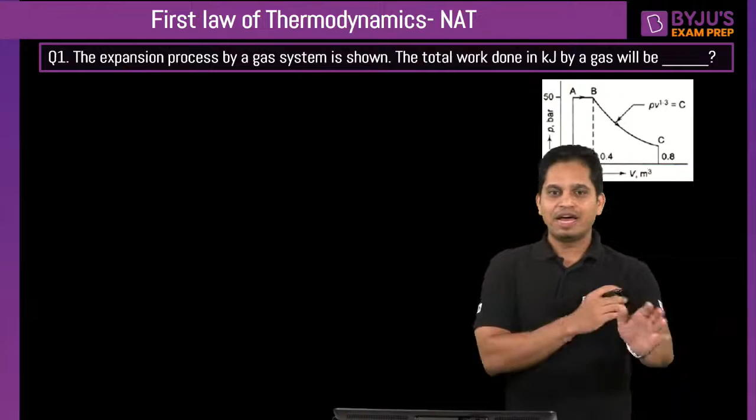So you see this diagram, right? So let me write the data here. What is given to you? So we have process A to B. Here pressure is constant. PA is equal to PB is equal to 50 bar. And VA is equal to 0.2 and VB is equal to 0.4. It is a constant pressure process. And we all know,

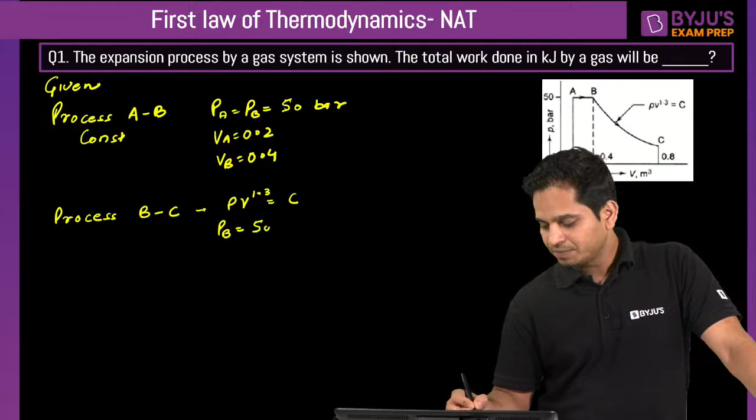Okay, so process BC is following PV^1.3 equals constant. What do we know here? We know PB is equal to 50 bar. PC I don't know. VB I know, which is 0.4, and VC is 0.8. It is a very basic question and it is a GATE level question. We will come to more complicated questions, very nice questions where you will actually feel that you have learned something new today. Okay, so let's start this.

We have two processes. Total work done is what? Total work done is work done by AB process plus work done by BC process. And I already told you in the Telegram group, please revise your first law concept: heat transfer, work transfer, first law for a cycle, first law for a process. So we all know this, right?

So work done for process A to B is a constant pressure process. So it is P times VB minus VA. Do I need to solve this for you? Work AB is, that is right, 1 megajoule, yes. That is correct, Bhavya, very nice. Work BC is 1.25 megajoule, that is correct. I want everyone solving this, really. You need to understand the importance of solving the question. I know that you know how to calculate work AB.

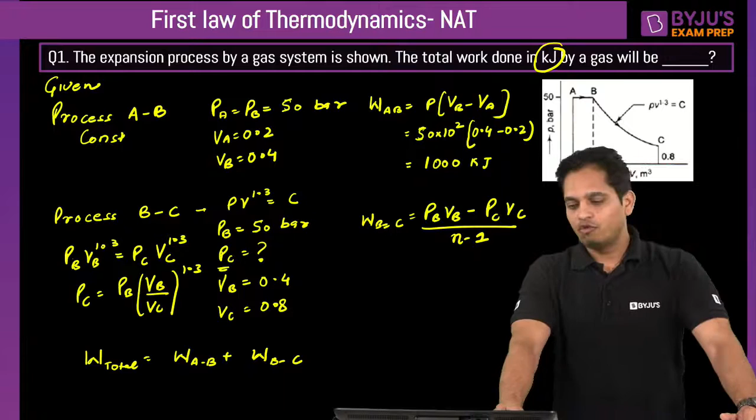Okay, so now we need to calculate PC. How can I calculate this? PB VB^1.3 equals PC VC^1.3. So PC equals PB times (VB by VC)^1.3. Do I need to put the values? I don't think so. I know that you are all capable of doing this, so we can put our time to better use, right? So when you put the values, you calculate PC. I think Bhavya calculated it earlier, 20.3 into 10 to the power 2 kilopascal. You calculated in bar, right?

Yes. So when you put the values here, you will get work BC is how much? 1253.3 kilojoule. And then you sum them up, and you will get what you have gotten, 2251 I am assuming. 2253 I got, but it's okay, no problem. Kilojoule. Should we move ahead?

I need everyone's participation. Madhvi, okay. Kalyan, Kiran, 2.25 megajoule. Always read the question very carefully. See in what units, because units are very, very important. Okay.

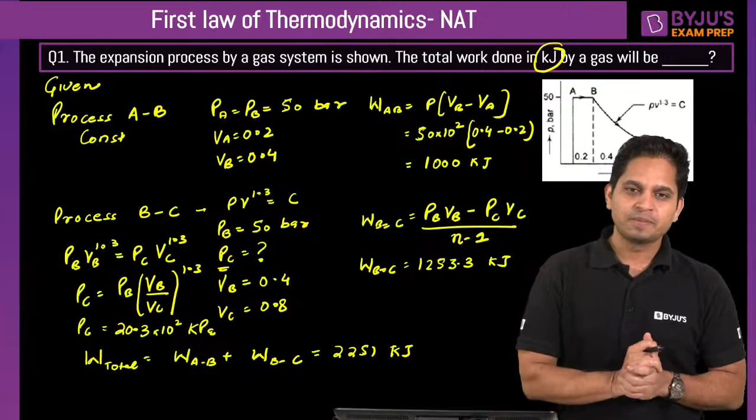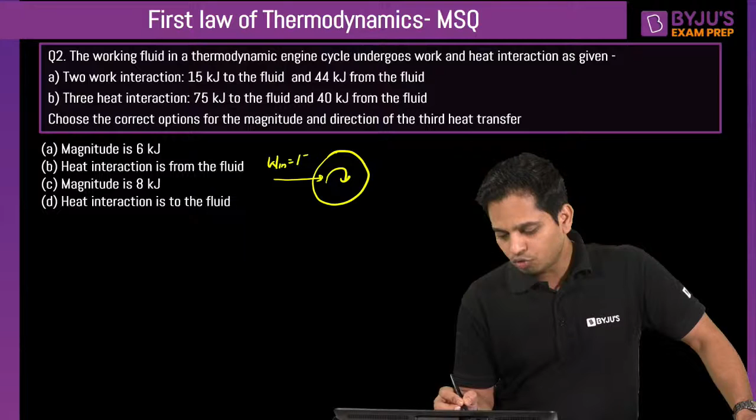Now, this question: the working fluid in a thermodynamic engine cycle undergoes work and heat interactions as given. So we have a cycle. I can show the cycle by a circle with clockwise rotation. Let me draw it here. Now heat and work interactions are happening: 2 work interactions, 3 heat interactions. How is work interaction happening? Work in is equal to 15 kilojoule and work out is equal to 44 kilojoule. Heat interaction is also happening.

How? Q in is equals to 75 kilojoule and Q out is equals to 40 kilojoule.

This is happening, and they are saying there is one more heat interaction that is happening. I don't know what direction, so let me assume that there is a Q3 and it is going out, from the fluid, rejected by the cycle.

I am assuming this. Now they are asking: choose the correct option for the magnitude and direction of the third heat transfer. It is an MSQ, so more than one option can be correct. Multiple select question. Magnitude is 6.

Yes, magnitude is 6, that is correct. But what is the direction? To the fluid or from the fluid? From the fluid, that is correct.

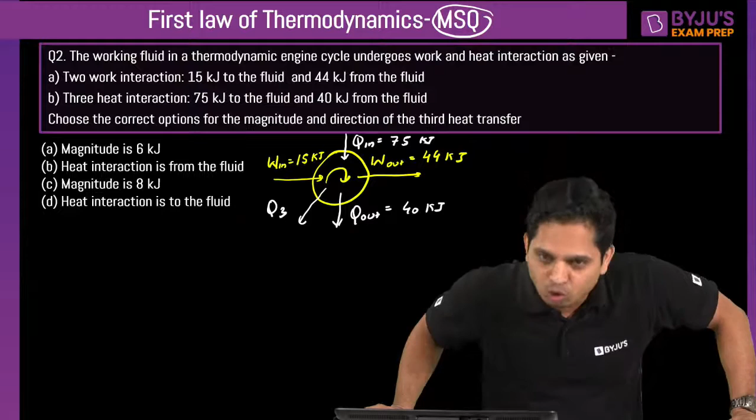Is everyone solving this? There are 15 people I can see here. I need everyone's answer. Magnitude is 6 kilojoule, yes that is correct, and heat interaction is from the fluid.

So do I need to solve this for you? First I won't solve it, I'll just write the concept. First law of thermodynamics for a cycle. What did we study? It is summation of Q is equals to summation of W.

You can also solve this by simple first law. Energy in is equals to energy out. Whatever is coming in is equal to whatever is coming out. And you know everything, there is only one unknown. You can also do using this or you can use this.

So what is Q? Q in is positive for me. Q out is negative, and I am assuming that Q3 is also going out, so minus Q3 is equals to W. Work going in is negative, so minus W in plus W out. You put all the values and calculate Q3.

If this Q3 you get positive, what does it mean? If it is positive, it means it is in the same direction that you have assumed, right? If this Q3 is positive, it does not mean it is given to the system. You have already assumed that it is going out, so you have already taken that sign. Now, if it is coming positive, it simply means it is same as how you have assumed.

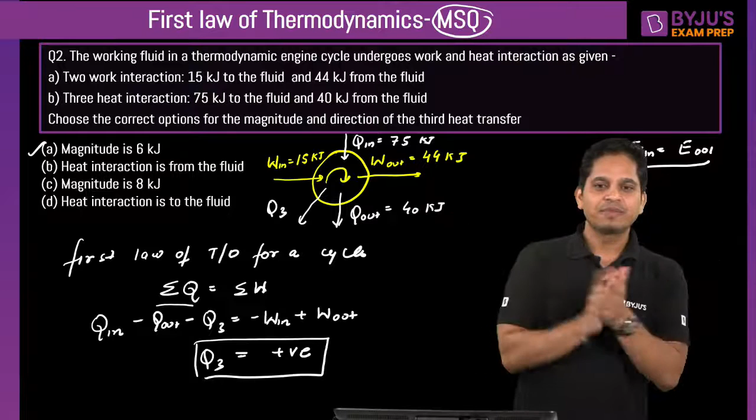Heat is out, yes, and 6 kJ Deepak, that is correct. So A and B was correct, right? A and B was correct.

Okay, let's move ahead. Now, can anyone tell me what C is this? Is it specific heat at constant pressure or specific heat at constant volume? Can anyone tell me? Very quickly, these are all concepts. So what is this C? It is specific heat at constant volume or constant pressure.

That is correct Bhavya, it is liquid, and Subhadeep, that is correct, both are same. When we talk about solid and liquid, C is always constant. Cp is equals to Cv is equals to C, that's all. When we talk about gas, yeah that is correct, it is incompressible.

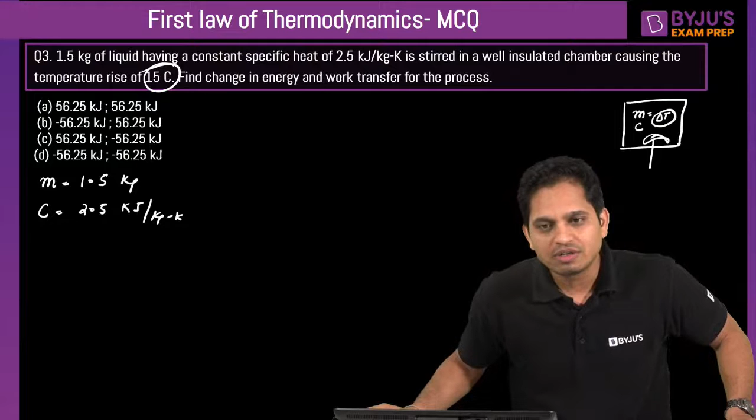Find the change in energy. What is happening here? It is a heat addition process. Some people are confused, saying the temperature is rising, but it is well insulated, and I am saying it is adiabatic. So du is equals to minus W, and du is equals to W is equals to negative.

You have explained it somehow, but let me see if everyone gets it. du is equals to 56.25, that is correct, and then W is minus 56. Absolutely correct, very nice, I need this crowd.

Because I can solve this, but I need your participation so that I can solve more questions here and you can get more practice. That is correct, du is equals to. Very quickly I will explain the concept and then we will move ahead to one question.

So what is happening here is, this is my chamber, an insulated chamber. As soon as I say insulated, let me explain this. I am giving some work to it, work in. When I give this work, the fluid, the liquid that is there, is getting heated. So whatever liquid is there, its temperature is going to increase by delta T, 15 degrees Celsius. But this is insulated.

So there is no heat interaction between system and surrounding. This Q is equals to 0. So if I say first law of thermodynamics, for a cycle we have seen in the last question, what is it for a process? For a process, this is the heat addition process, right? This work is converted into heat, and that is raising the temperature.

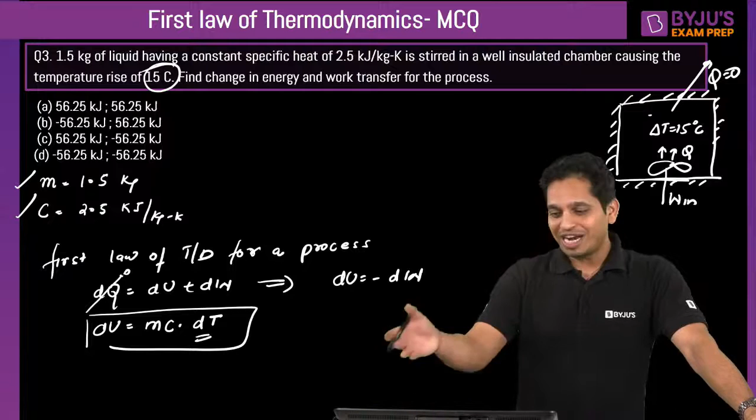Now dU is there, and from this I can calculate dU. And from this, what can I write? dU is equals to minus W. And we can see also that work is negative for us, since we are giving this work. So we can see this, there is no hunch here, we are not just guessing.

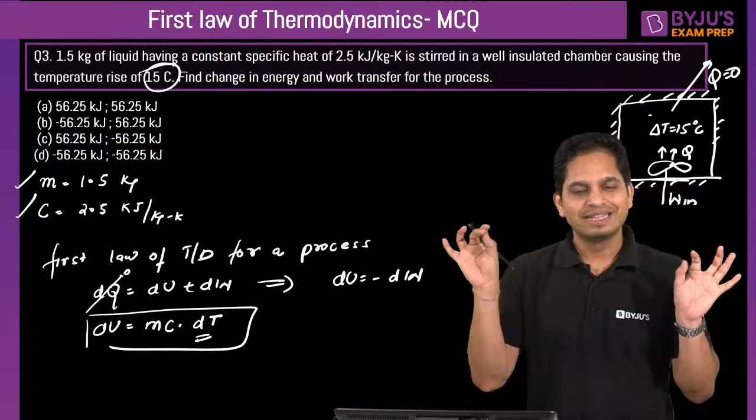Let's move ahead. Now, one homework question for you. This is a well insulated chamber. But if the same question is for a conducting chamber, this is homework question number 1: if this is a conducting chamber, then you have to calculate change in energy and work transfer, and heat transfer is happening now because it is a conducting chamber. Heat transfer from the liquid to the surrounding is given.

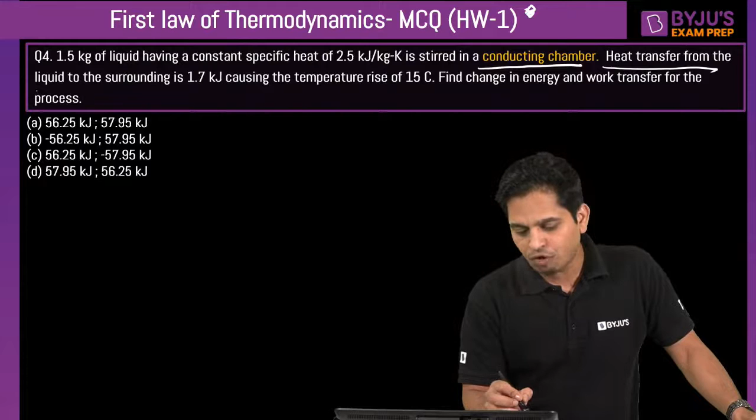Temperature change is still 15 degrees Celsius.

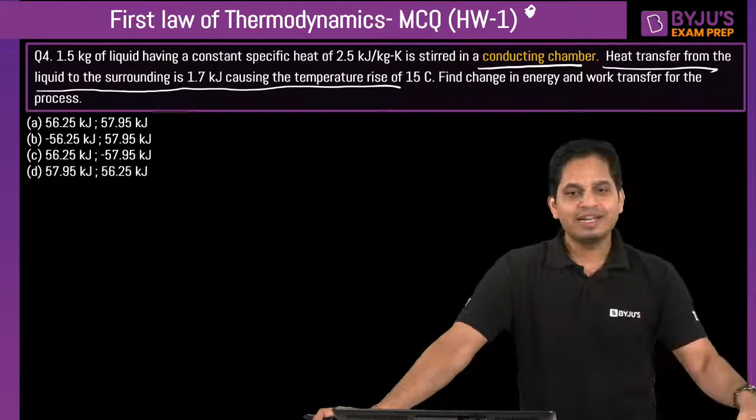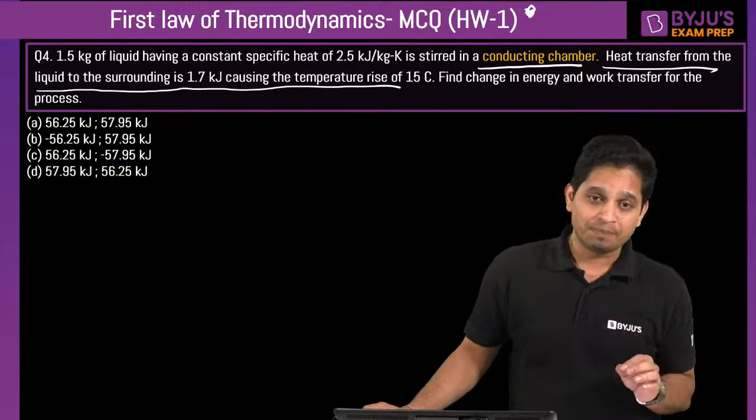Now this is the main question. Let's read this question. What is happening here? We have a piston and a closed cylinder. Let's draw it here. So we have a closed cylinder and there is a piston here.

A closed cylinder of 0.25 meter diameter is retained at a position through a spring and a stopper. So we have a spring here and some stoppers here. The volume on one side contains air at 750 kilopascal, and the other side is evacuated.

Very good question, I am going to tell you. A lot of concepts are going to come out from this. And the other side, this side is evacuated. Now at this position, a spring is exerting 120 Newton force on the gas.

Now what we will do? Now stoppers are removed and the piston will go up. Then when the piston goes up, it will stop somewhere. It will travel a distance of 1.2 meters and then it will stop, at this position.

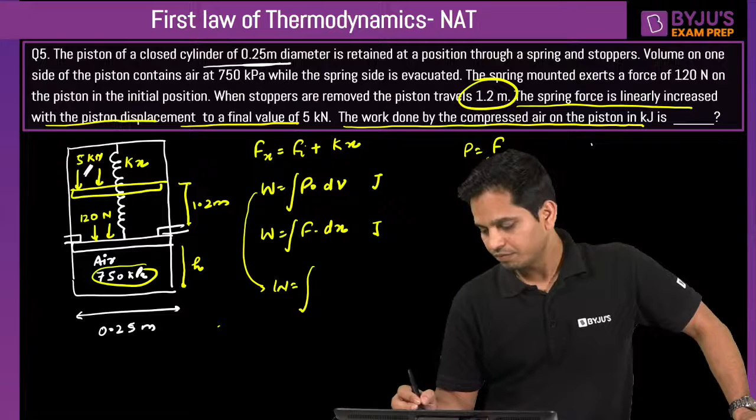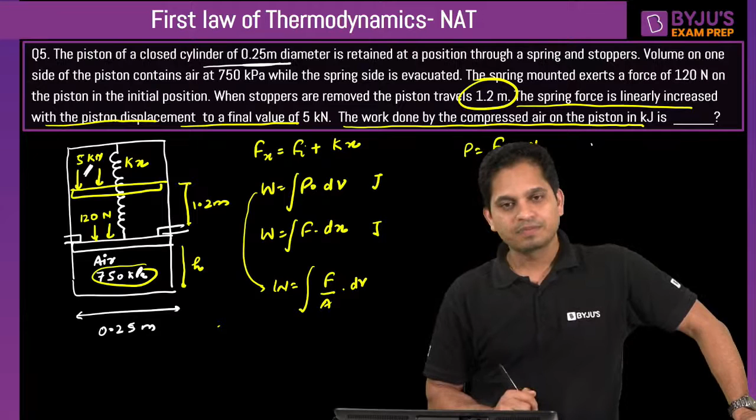Can we write force upon area into dV? And that comes to be force into dx. So these formulas are interchangeable. Similarly, we can also see for a PV diagram. If I draw a PV diagram, I hope that is visible to you. So in a PV diagram, what do we do?

3.7 kilojoule, just one second. 3.7 is not correct, I think you are close, but not 3.7. That is absolutely correct, very nice.

Very nice, okay, so now just let me explain the concept. If we know P1 and P2, we know P1V1 and P2V2, then we can draw it like this, and we can calculate the area under the curve, right? We can do the same thing by dividing this by area. So this is force and this is the distance that it has traveled. We can draw this on a force-distance diagram as well.

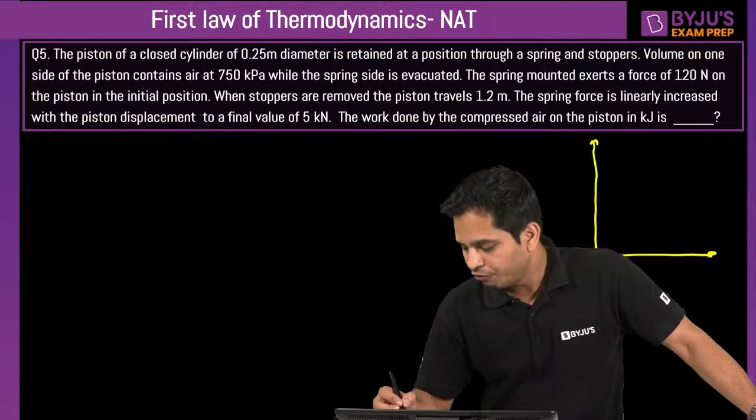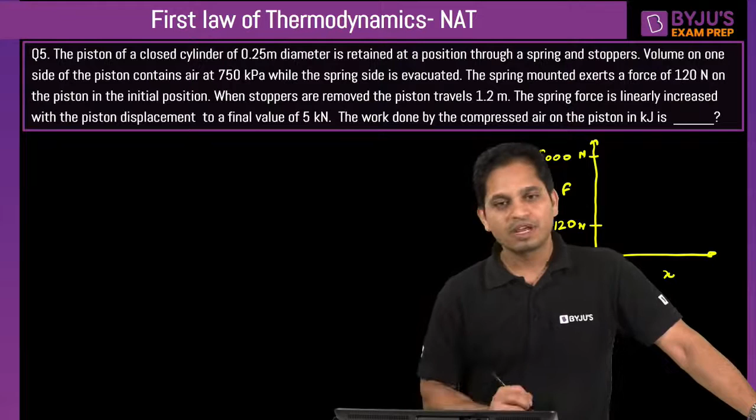So let's do it here. Now F1, what is F1? F1 is force into x. F1 is 120 Newton and F2 is 5000 Newton, and it is changing linearly. And for x, if we assume initial value of x is 0, x1 equals 0, x2 equals, it has moved 1.2 meters. So this is my initial value and this is my final value. I hope you can solve this now.

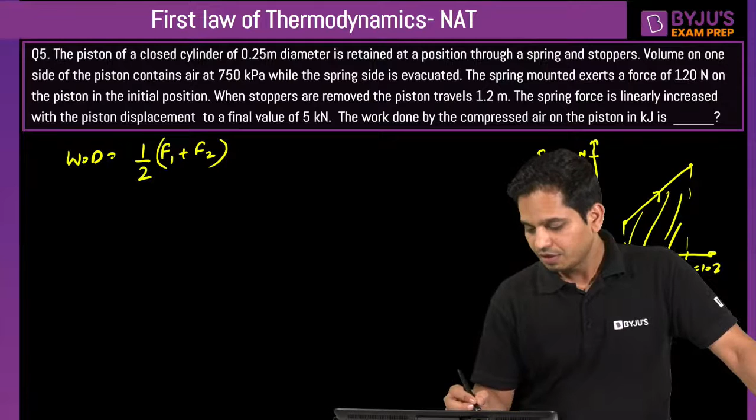You see, work done is equal to area under the curve. How is it? 1/2 (F1 plus F2) and (X2 minus X1), isn't it? So you can get this. I know that you will find this: 1 upon 2, 120 plus 5000, and 1.2. So if you solve this, you will find 3.072 kilojoule. Very nice. That is absolutely correct.

There is one more way of doing it. So work done is equal to F dx. Just for the concept I am going to tell you, okay? Now we know that force is changing linearly. Fx is equal to the initial value, 120, plus kx, spring constant and the distance, okay? Now this is 5000, this is 120, plus k, this is 1.2.

So you can find k here and you can write Fx is equal to 120 plus k, whatever value you get, and x. And then I can put it here: 120 plus kx dx. Now I know this k. So now I can integrate this from 0 to 1.2. So try this also, you will get the same answer. Okay? Is this okay? Can you tell me? Then we'll move ahead.

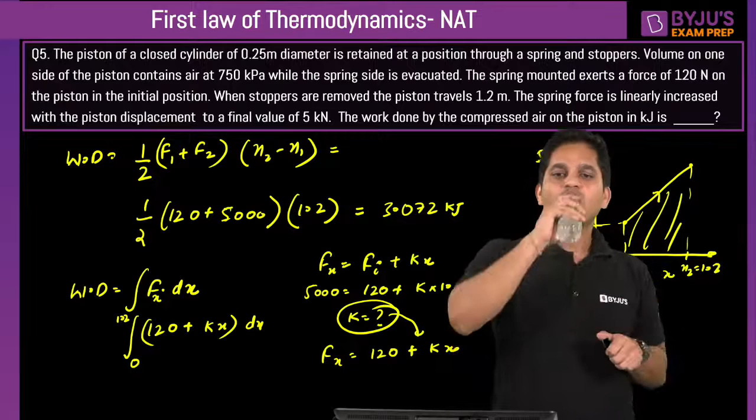K is equal to 4066. I think that is, yeah, 4067. That is correct. Okay? So you put K here, 120 plus 4067 x, and then you can integrate this. Only x is there, right? You can integrate this: 120x plus 4067 x square by 2, and you can put 0 to 1.2 and you can solve this.

Pressure is basically telling you that there is a way that you can calculate with pressure as well. But then you have to calculate pressure at 1 and 2 both. And I am not sure because this height is not known to you. And I need to find this area as well, because pressure is equal to force per unit area. Now 120 upon area, pi by 4 d square. Maybe you can find this as well.

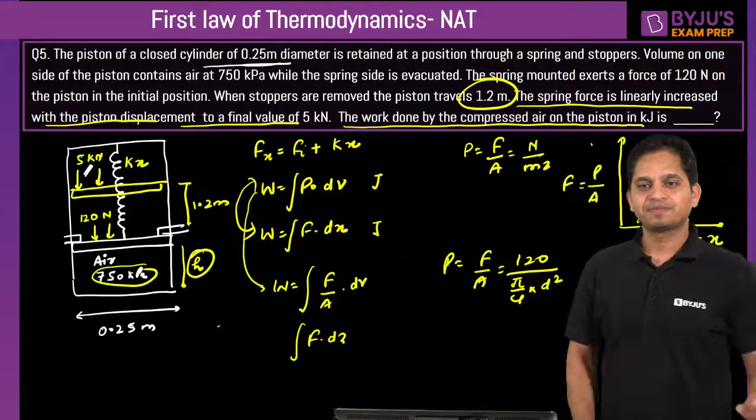You can try this as well, but I have not tried this way. You see what is P1, and then you can find out P2 as well, 5 kilonewton. So from that also you can try. So these are different ways of doing it, but I have not tried it this way. See if it comes there, okay. Let's move ahead with the next question.

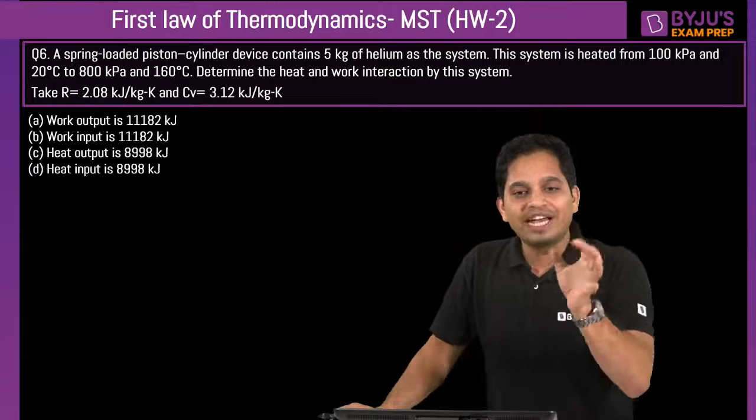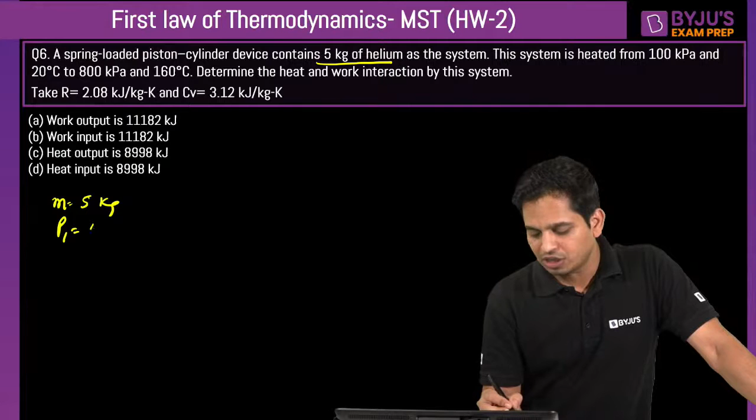So sixth, now this question. This is the same question. Whenever a spring-loaded piston is there, even if they do not tell you, you see what is happening. We have a spring-loaded piston cylinder device that contains 5 kg of helium. So mass is 5 kg. Now when you heat this, the pressure is changing. P1 is 100 kilopascal and T1 is 20 degrees Celsius. P2 is 800 kilopascal and T2 is 160 degrees Celsius. Now I need to find out heat and work interaction.

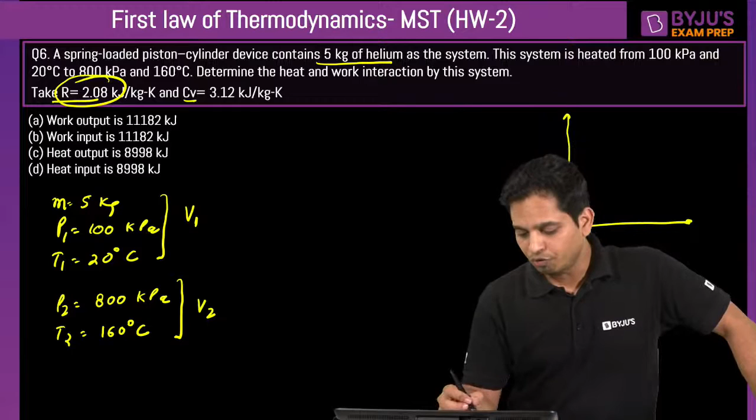How do I find out work interaction? As soon as they tell you that it is a spring-loaded piston, you can find out V1 and V2, isn't it? Because R is also given. So V1 is equal to MRT1 upon P1. So you can find out this. And similarly, you can find out V2. Now I know P1, V1, P2, V2. As they have given you a spring-loaded piston,

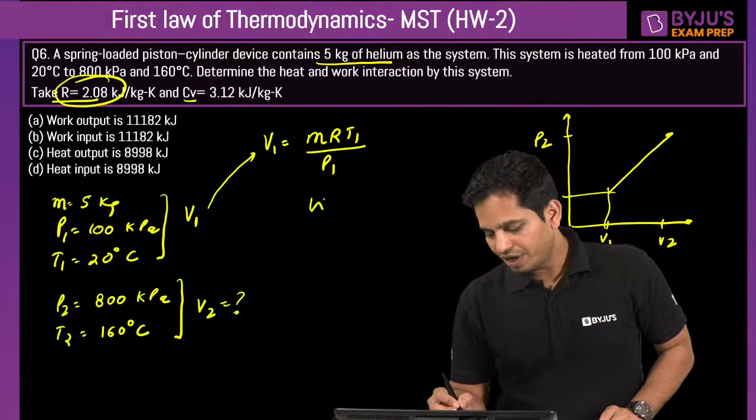So you can calculate work done. Work done is equal to 1 upon 2... Okay, this is homework. So you can try this as well. Write question number 2. Easy, isn't it?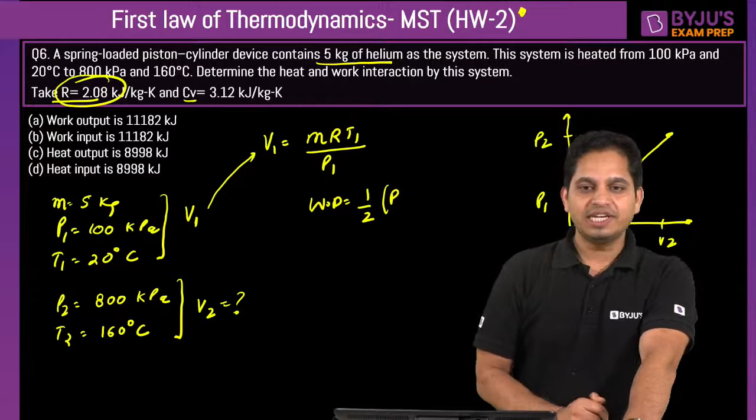Fun with whoever is this person. Okay, so could you please do that marketing somewhere else? Okay.

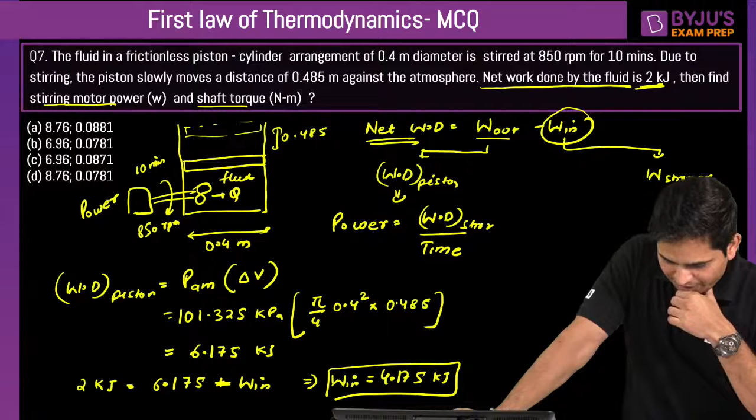What is the power of that motor? Power of this motor will be work done by stirrer upon time, isn't it? Kilojoule per second is kilowatt. So very quickly tell me. 371, let me check. Motor power. That is not correct. 6.96 watt is correct. You have to calculate this in watt.

Subhadeep, what are you doing wrong? Why has this value come? The time is given in minutes, so you need to multiply it by 60. So work done is 4.175 into 10 to the power 3, divided by 10 into 60. If you calculate this, you will get 6.96 watt. Did you get it, Subhadeep? You must get it, or you were doing something wrong. So 6.96, either B or C is correct.

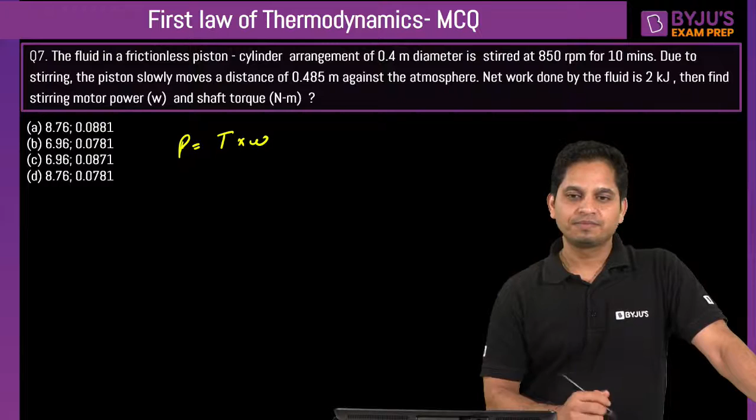Then what about torque? How do you calculate torque? Power is equal to torque into omega. Yes, very nice. So torque is equal to power upon omega. That is 6.96 as you have calculated upon 2 pi N by 60. So 60 will come here. I hope you will calculate torque. How much is torque?

Repeat? Okay, what do you want me to repeat? Just 1 second. So look, what is happening? We have a piston cylinder arrangement. This one, right?

That is okay. Who is asking to repeat? Please repeat. Deepak, which question? This question, right? Last question, which one? It is the same question, for which torque I calculated.

Okay. So what is happening here is I have a piston cylinder arrangement. Now the piston is flexible. Piston can move. Now I have installed a stirrer, and that stirrer is run by a motor. Because if I have to rotate something, I need to install a motor, right? I cannot manually do it to raise the temperature. So I have a motor that is rotating a stirrer. Because of this stirrer, the internal energy of the system is increasing, and then it is pushing the piston up.

Now it is saying the net work done. Net work done means what? The work that is out. So work out is what? When the piston is moving, it is doing some work, that is work output, minus the work input. What is work input? The work that we have to give to the stirrer. So work output we can calculate like this, because this piston is moving against a constant pressure, which is atmospheric. There is no other pressure.

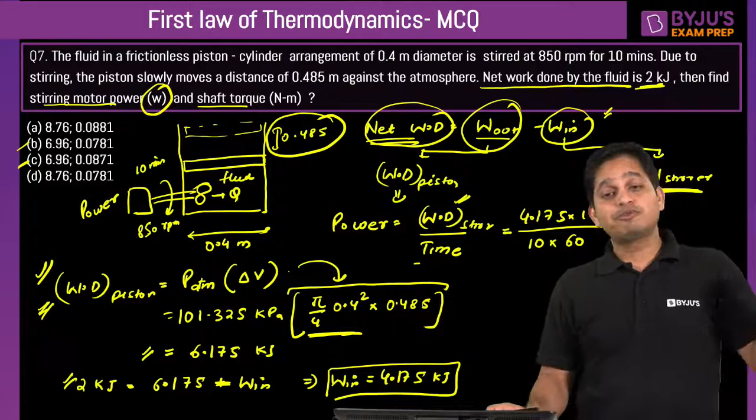Once we have calculated power, power is equal to torque into omega, and torque we can calculate. Is this okay, Deepak? Can we move ahead? We are on the 7th question. Is this okay? Then we can move ahead. Deepak, can you please give us good to go?

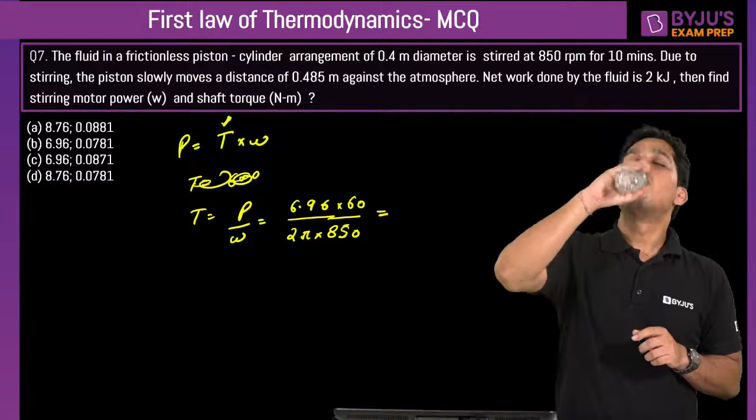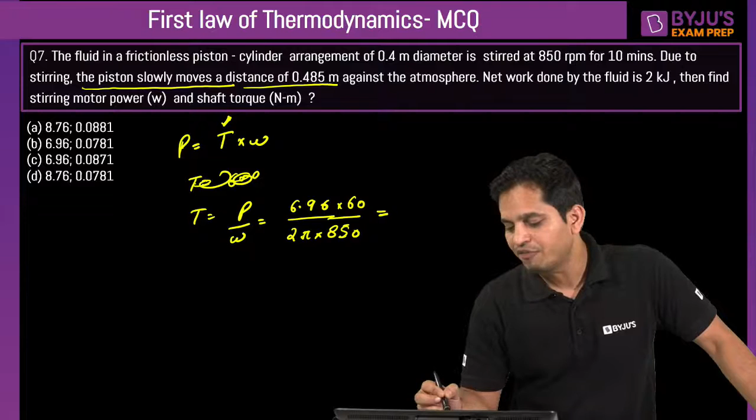They are saying that the piston is slowly moving a distance of 0.485 against the atmosphere. So the only pressure the piston has to resist is atmospheric pressure. That is why it is happening at atmospheric pressure only. Is this okay? That is why we have taken atmospheric pressure. Can you tell me, is this okay? Then let's move ahead.

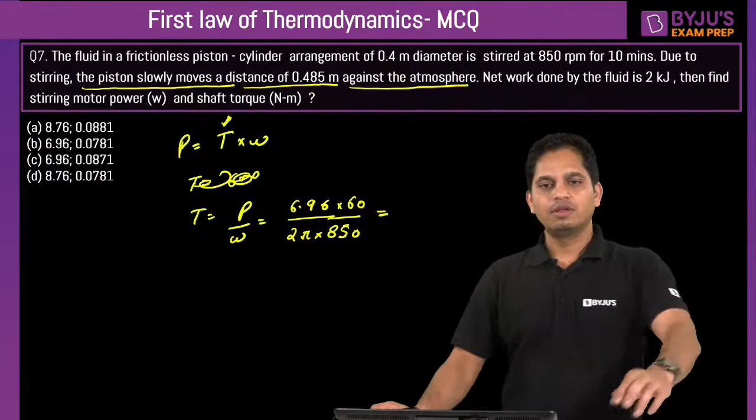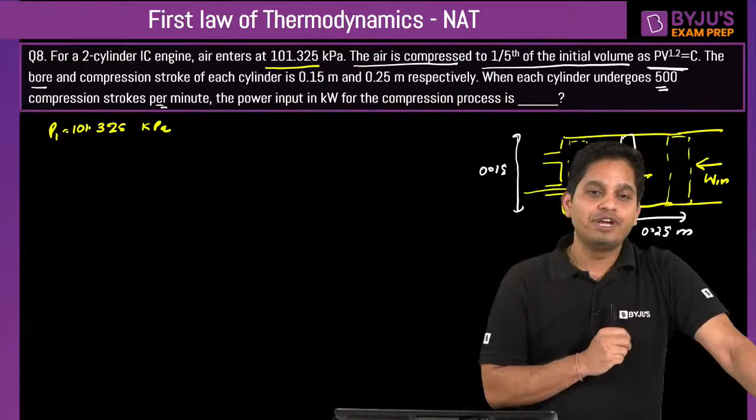The bore diameter is also given, 0.15, and 0.25 is the compression stroke. When each cylinder undergoes 500 compression strokes per minute, I need to find the power input in kilowatt. Now we know it is a polytropic compression process. So what can I write? Work done per cylinder. There are 2 cylinders, right?

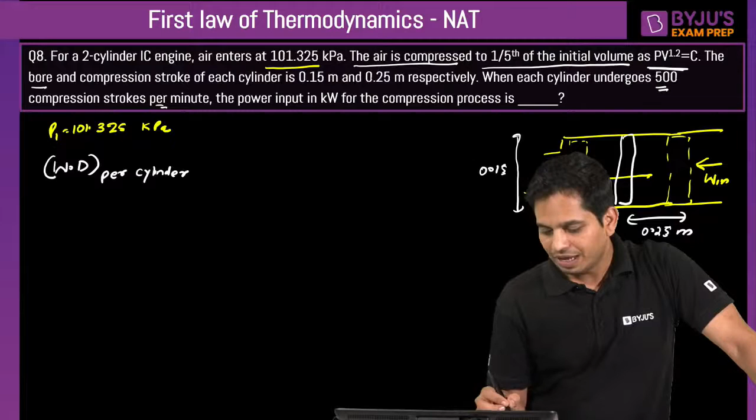And work per stroke is equal to P1 V1 minus P2 V2 upon n minus 1, right? This is how it is happening. So now P1 I know, P1 is equal to 101.325 kilopascal. How do I calculate P2? I know that P1 V1^1.2 is equal to P2 V2^1.2. So P2 is equal to P1 (V1 by V2)^1.2.

And also I know that V2 is equal to V1 by 5. That means V1 by V2 is equal to 5. So I can put 5 here, and P1 I know, so I can find out P2, which Bhavya has calculated to be 700 kilopascal. So I know P1, I know P2, but I do not know V1 and V2. How do I calculate V1 and V2? Is anyone doing it with me?

So look, they have given compression stroke. So what does it mean? When the piston moved from here to here, there is a change in volume. So that change in volume, I should write it here. dV is equal to V1 minus V2. Okay, now what is this dV? It is pi by 4 d square into dx. It is area into dx. dx is how much? 0.25.

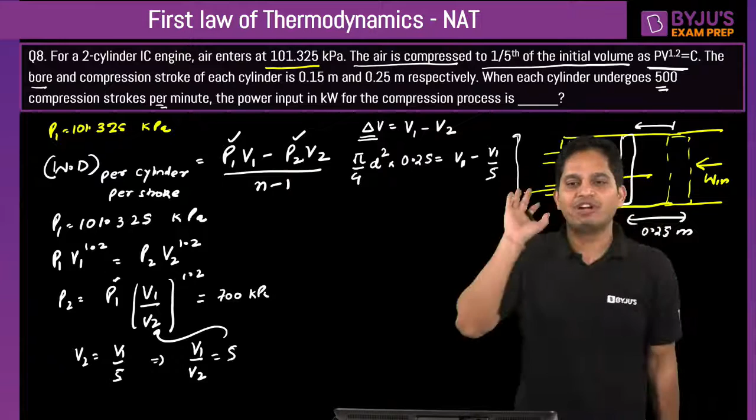Now this is V1 minus V1 by 5. V2 is what? V1 by 5. Isn't it? So can you calculate V1? You just calculate V1. Once you know V1, you can calculate V2 as well. Yes, that is correct. Pi by 4 d square into the distance that the piston has traveled. So V1, how much is V1? V1 is equal to 0.00552.

No, look, first of all, if clearance volume is not given... whenever you do IC engines, there are 2 volumes that we do when we analyze this, one without clearance, one with clearance. So if in the question they have not given it, you will not assume that clearance volume is there. The second thing is, they have clearly mentioned compression stroke. If it is a normal stroke, then it goes from TDC to BDC, from this point to this. That is your normal stroke.

But they have given compression stroke. So during compression, it will move from some point to the other point. Arihant, is this okay? Do you understand this? They have clearly mentioned compression stroke. That means during compression, it is moving this distance. Yes. So now you know V1, you know V2 as well. V2 is equal to V1 by 5.

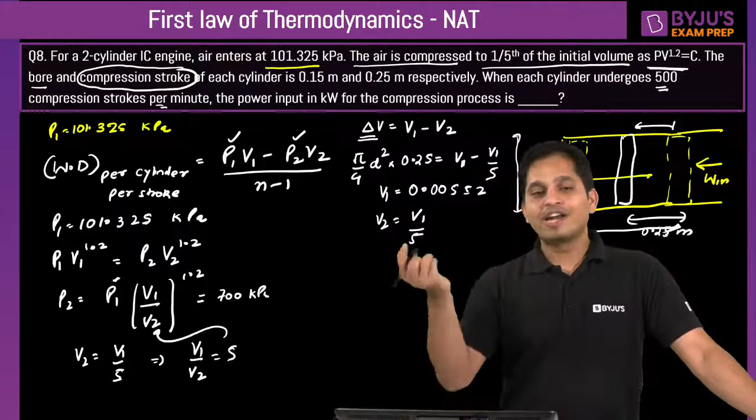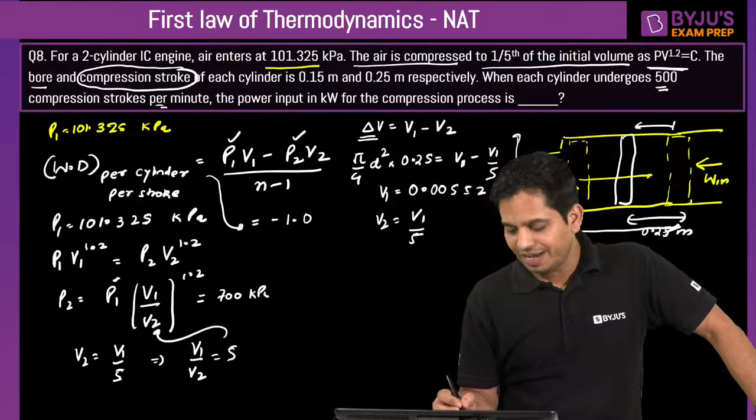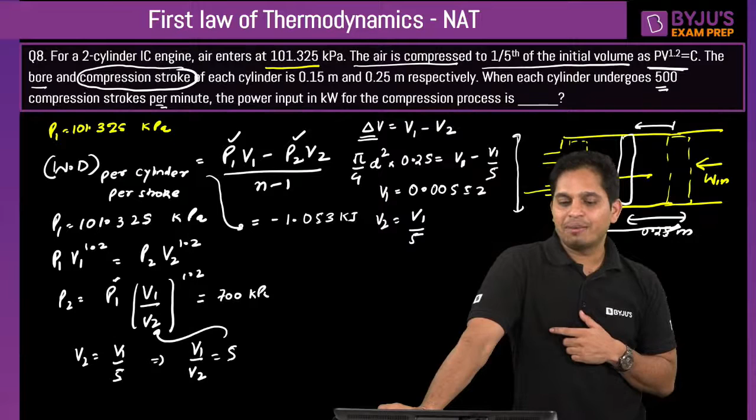Now you can calculate work. Work is minus 1.053, I think that is correct. So work done per cylinder is equal to minus 1.053 as you have calculated, and it is in kilojoule. Now we have two cylinders, and there are 500 compression strokes per minute, and we need to find out power.

So work done as you have calculated is minus 1.053 kilojoule per cylinder per stroke. Number of cylinders is 2, into 500 strokes per minute. So stroke will cancel, cylinder will cancel, into 1/60 minute per second. That is minus 17.7 kilowatt. That is absolutely correct.

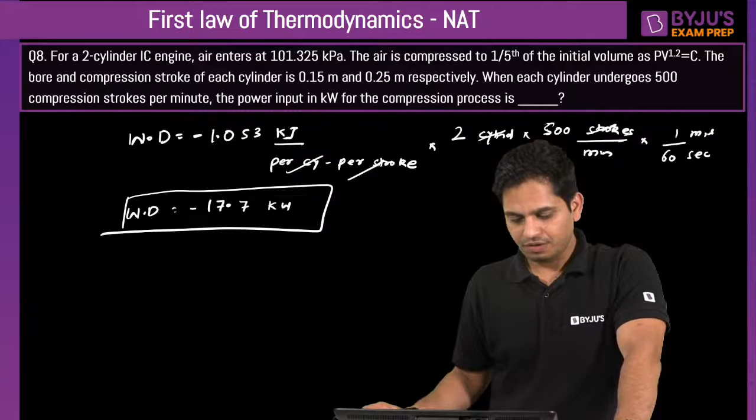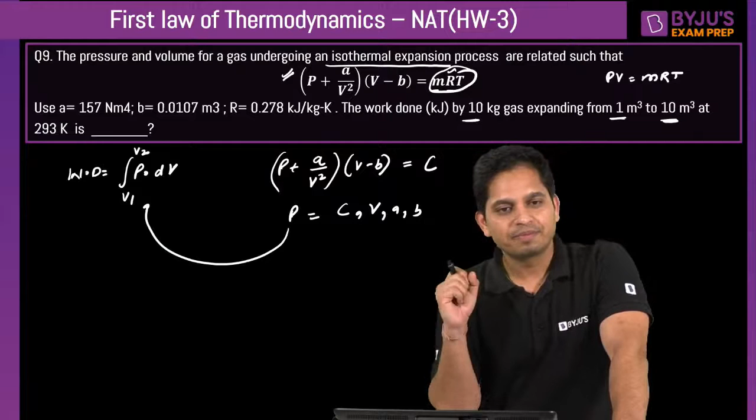So let's move ahead to the next question. Okay, this is also a homework for you. 8 kg of gas. I am not going to read this; we are running out of time. This is question number 4, homework.

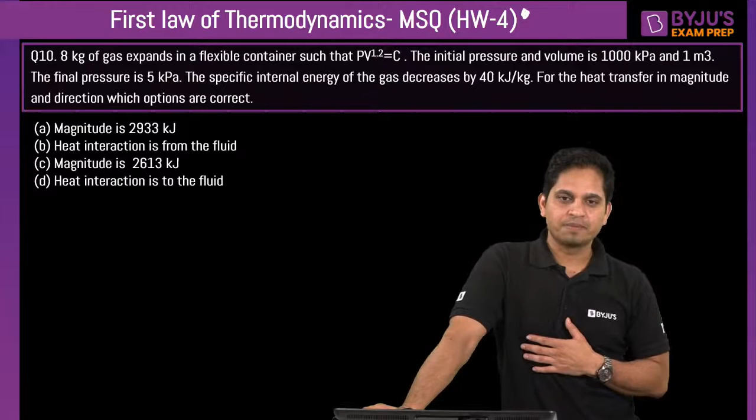Okay, so these are all very good questions. It requires concepts beyond conventional things that you have learned. Something new you will get in every question. So now this is a question. A hypothetical engine with 1 kg of gas, 1 kg of gas I have missed here, can be represented as a circle on the PV diagram.

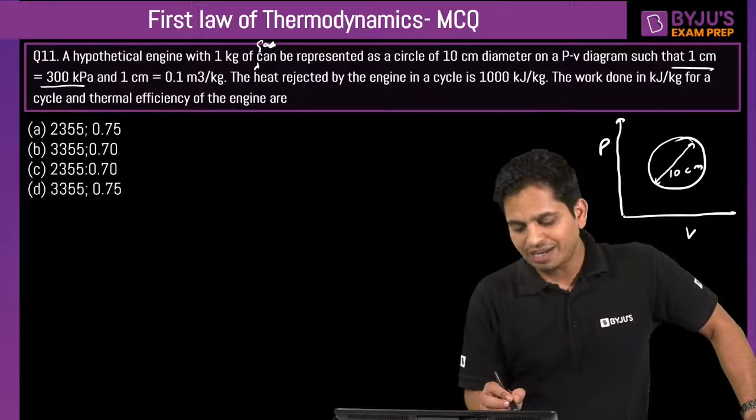So if we have a PV diagram here, this engine can be represented as a circle with a diameter of 10 centimeters, such that 1 centimeter is equal to 300 kilopascal, and 1 centimeter is also equal to 0.1 meter cube per kg. Heat rejected is also given. Calculate the work done in kilojoule per kg for a cycle and thermal efficiency.

So what do we know? We know that the area within the cycle on a PV curve gives you work done. So work done is equal to area under the cycle. It is a circle. Can I calculate the area? It is pi by 4 d square, so 10 square. So it will be how much?

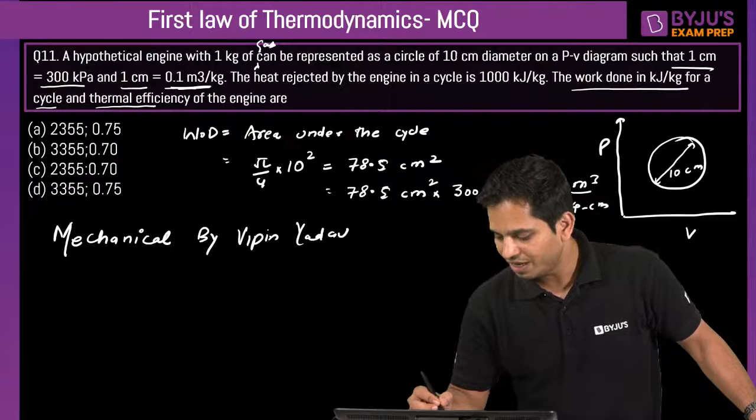78.5 centimeter square into 300 kilopascal per centimeter into 0.1 meter cube per kg per centimeter. So the centimeter square will go, and it is kilopascal into meter cube per kg, so this is now in kilojoule per kg. I got 2355 kilojoule per kg. And then heat rejected is given.

So for a cycle, this is Q1 which is given. Work I have calculated, and Q2 is given. So Q1 is equal to work done plus Q2. Simple. And efficiency will be equal to work done by Q1. So aren't these good questions? Have you done these kinds of questions? Because each question is important. It gives you a new concept.

Look, the concept will remain the same. Everything you have already learned. Some of them, yes. I didn't make these questions; I have taken them from a book and modified them in an understandable language. But it is above the normal questions that you usually solve. Every question brings out a new concept. You have to put extra effort to solve these questions, and this is important because if you keep solving the same questions again and again, you are not going to learn anything new.

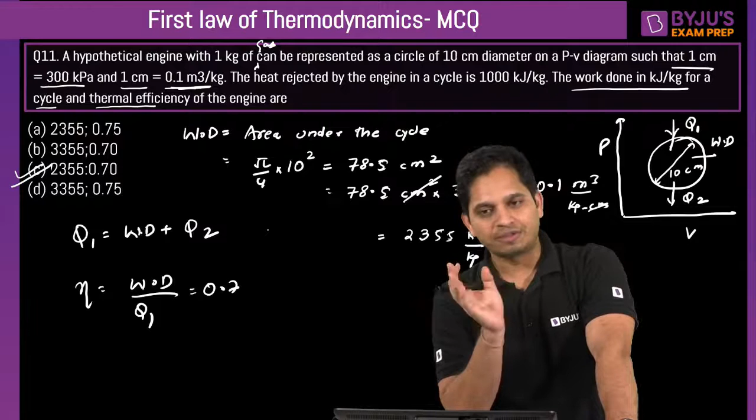Okay, 11th is done. Now again, this is a very simple question. We have solved it many times. 3 processes are given. You have to draw a PV diagram and calculate work done and heat transfer. You have all done it, but these types of questions are asked in exams, so please repeat this question. It is homework question 5.

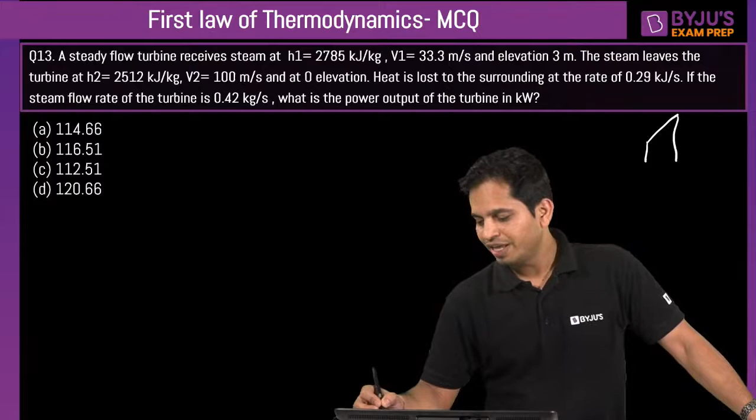Okay, so we have a steady flow turbine, a very simple question. We draw the turbine like this, and everything comes at H1 is given, velocity is given, elevation Z1 is given. It is leaving at H2 given, V2 given, and Z2 is 0. Heat is also lost.

I don't know if you are able to see this. So Q is equal to 0.29 kilojoule per second. Now the steam flow rate, m dot, is 0.42 kg per second. So we need to calculate the power output.

Very simple question, but open system questions are simple, you cannot do anything about it. Pick up any question from GATE previous year papers, steady flow questions are fairly simple. In fact, most of the times even velocity and elevation are not given. So whenever turbine, compressor, heat exchanger, diffuser, or nozzle comes, apply the steady flow energy equation. Very quickly tell me what is the power output.

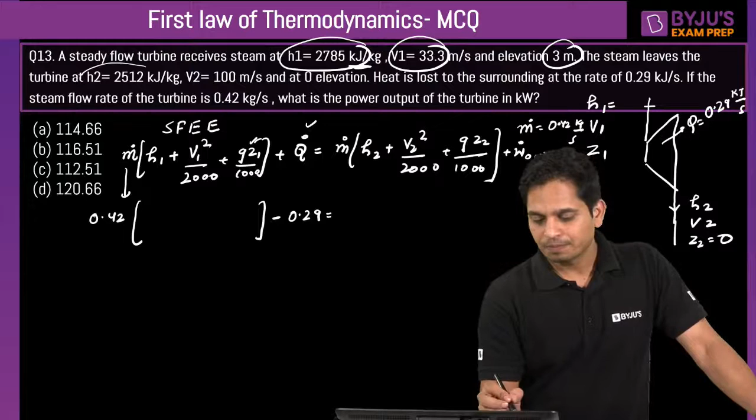But in steady state, we have assumed that we are adding heat, that's why it is positive. Now is equal to, again m dot I know, H2 I know, V2 I know, and Z is 0 this time, so this will go to 0. So I can calculate W. Very simple, right? So let's move ahead. Answer is C.

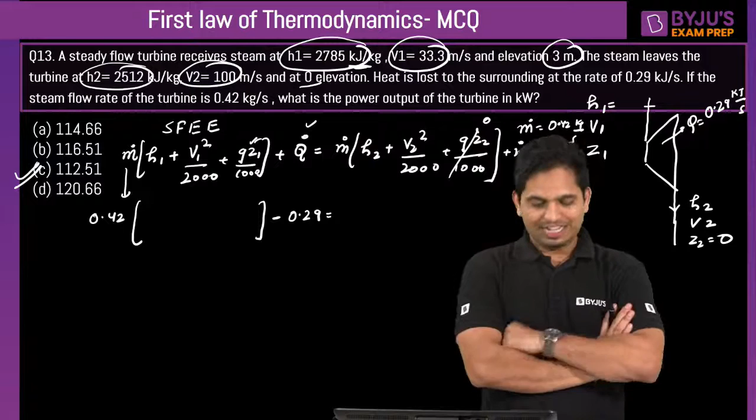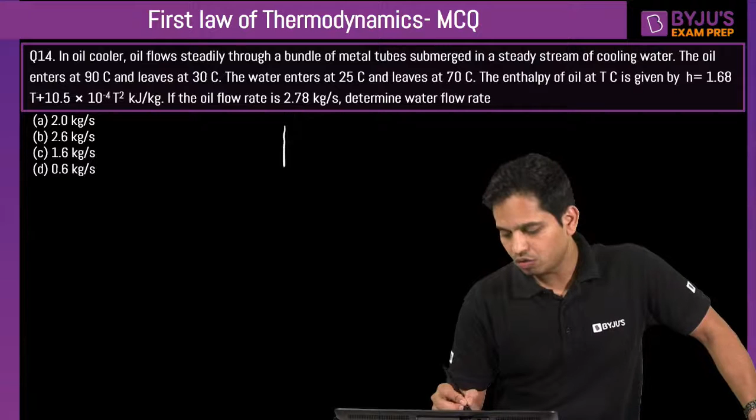Okay, let's move ahead, this is the same question. I'll give you the next question for homework. Now we have an oil cooler, this is my cooler, it is used to cool oil. Oil is entering at 90 degrees Celsius and leaving at 30 degrees Celsius.

Water is also entering at 25 degrees Celsius and leaving at 70 degrees Celsius. Enthalpy of oil is given, it is changing with temperature as 1.68 T plus 10.5 into 10 to the power minus 4 T square kilojoule per kg. Oil flow rate is also given as 2.78 kg per second. I need to find out the water flow rate, m dot water.

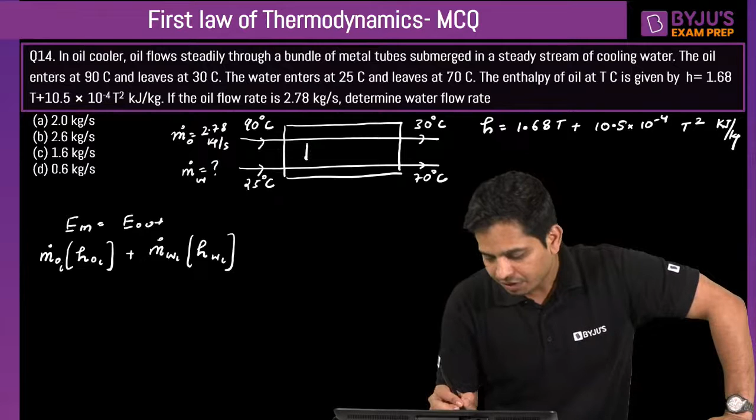Any idea how to do this? Simple: energy in is equal to energy out, it's steady flow, isn't it? What is energy in? That is m dot oil in, h oil in. Velocity and elevation we can neglect. Plus m dot water in, h water in. Now heat transfer is happening in the heat exchanger, but it is not going out of the system, so Q is 0, there is no Q. And since it is only a heat exchanger, work will also be 0.

Now what is going out? Going out is mass of oil exit times H of oil exit, plus mass of water exit times H of water exit. Simple, right?

Now, what is known, what is unknown? Look, this is known, and this we need to find out.

Is this known to me? Yes, I can calculate this as a function of T. Okay, I am hiding this. So HOI I can calculate this. I can put T in of oil and calculate this. Then HO exit, I can put T exit, which is 30 degrees, and calculate this.

1.59 is what? That is absolutely correct. Very nice. Where were you? Where were you since the starting of the session? Bhavya, are you able to solve this? Arihant, and who is there? Nagaswamy, very nice.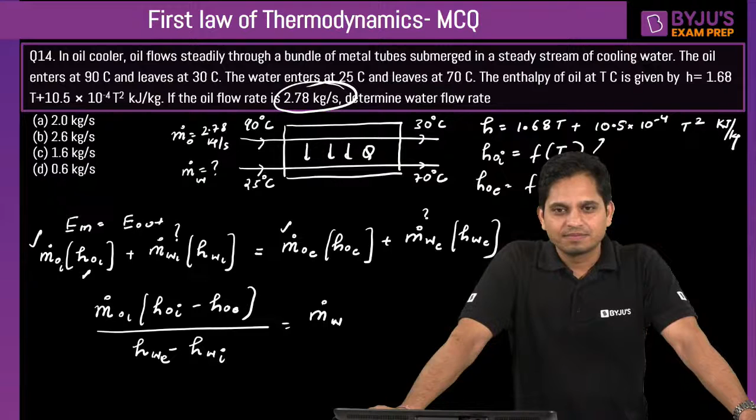Okay, anyway, have you solved it, Arihant? Then let's move ahead, very quickly. Yes, okay, then the answer is 1.6.

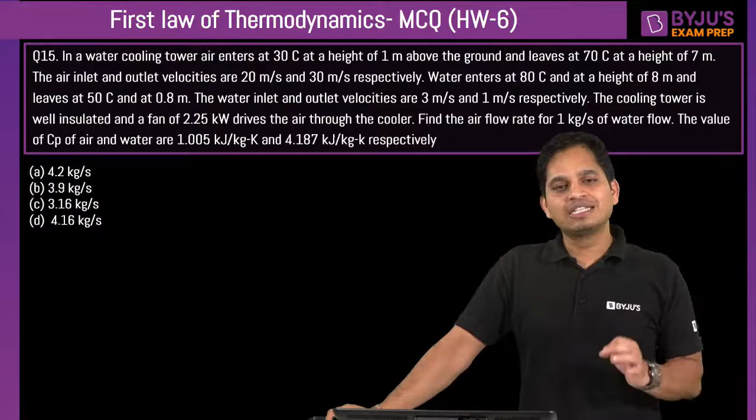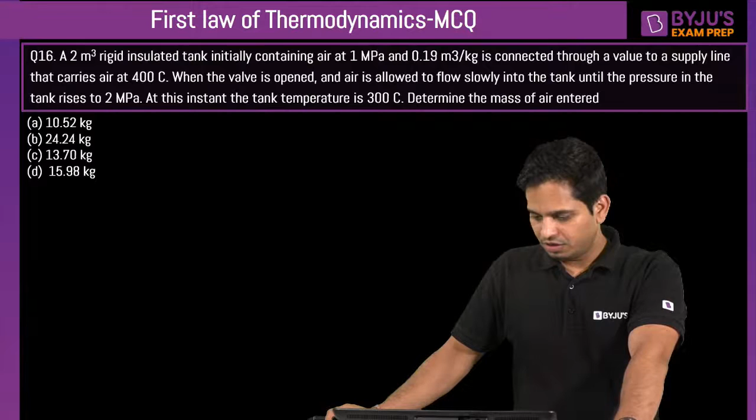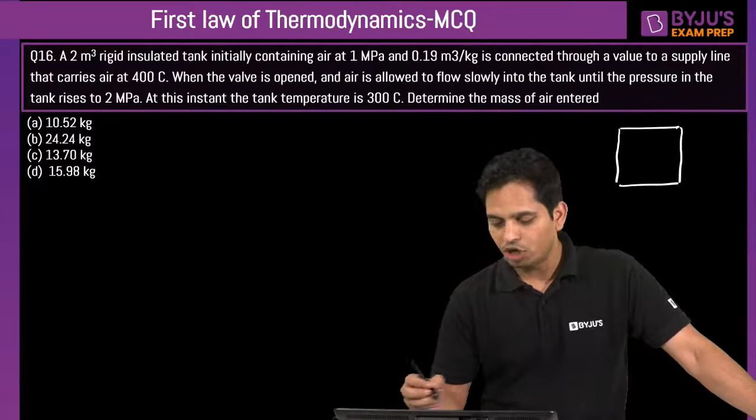Okay, let's come to the final question for today, 16th and 17th. Okay, anyway, 16th question, let's come to 16th question. 15th is given for homework. 16th question: a 2-meter cube rigid insulated tank. Okay, so we have a rigid insulated tank. Volume is 2 meter cube, initially contains air at pressure 1 megapascal and specific volume 0.19 meter cube.

So specific volume is 0.19 meter cube per kg, and it is connected to a valve supply, and it carries air at temperature 400 degrees Celsius. Now when I open the valve, air starts entering, and the pressure P2 -- so P1 is 1 megapascal and P2 is 2 megapascal. And T2 is also given, 300 degrees Celsius. Determine how much mass has entered.

So can I first calculate M1 from here? M1 equals V upon v1. So this is 2 upon 0.19 meter cube upon meter cube per kg. So what is M1? It is 10.52 kg.

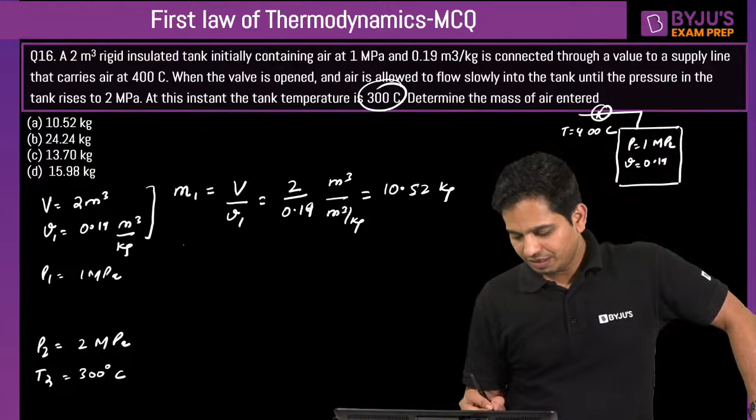10.52 kg. Okay, now can I calculate T1 as well? Also from here, I can calculate M2. How? M2 equals P2V2 upon RT2. So M2 equals 2 into 10 to the power 3, V2 will remain same, volume will remain same, 2 meter cube, R is air so 0.287, and T2 is also given 300. So 300 is how much? 573. How much is M2? M2 you will get 24.24.

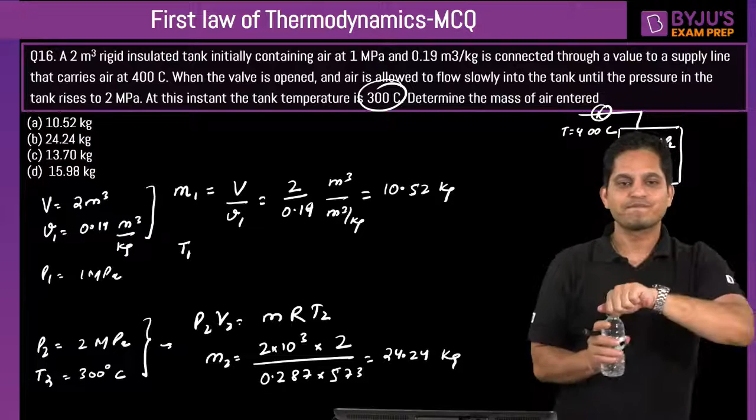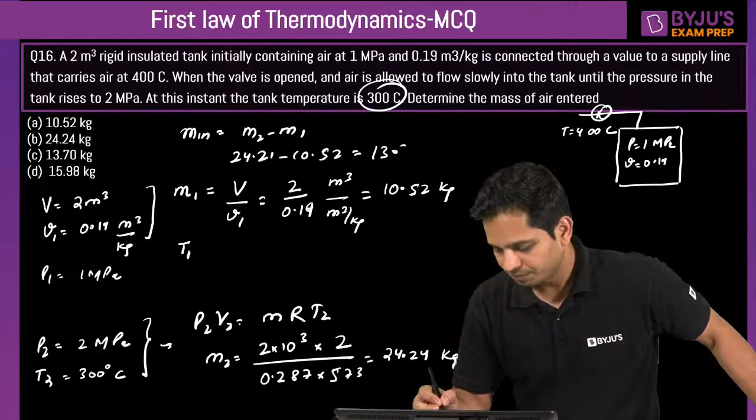So very quickly tell me how much mass has entered. Can you tell me what is the right option? How much mass is entered? Mass in will be equal to M2 minus M1. How much is entered? 24.21 minus 10.52 equals 13.7. That is correct, so C is the right option. Okay, let's do one more question, and the last question is for 17th. 16th we have done, C is the right answer.

Now the air is allowed slowly into the cylinder until the volume doubles. So V2 is how much? 0.2 meter cube, twice of V1, isn't it? And the temperature T2 reaches 250 degrees Celsius.

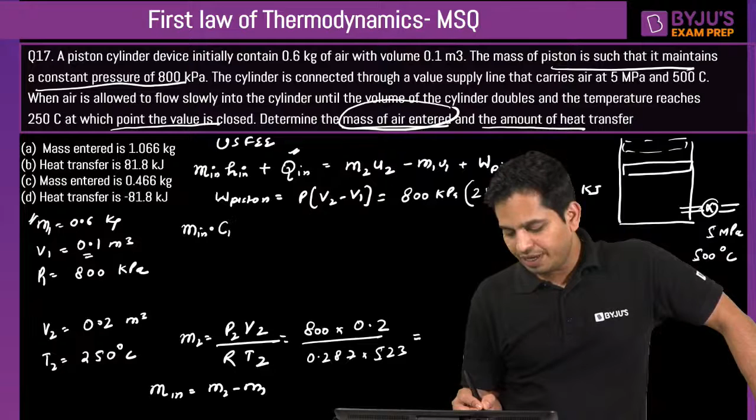It is saying it maintains a constant pressure of 800 kilopascal. So M in now you know, so M in you can keep here. Cp we know for air, and T in is also known, plus Q in is equals to M2, we have calculated, Cv T2 we know, minus M2 Cv T1, also we know, T1 we need to calculate, plus 80.

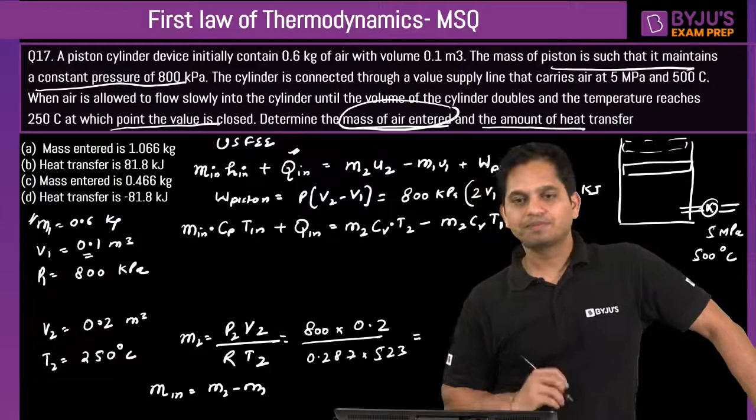So T1 also we can calculate from here. T1 is equal to P1 V1 upon MR. Now everything is known to me. M in is known to me here. Cp is...

1.005. T in is 500 degrees Celsius, convert this into Kelvin before you put this. Q in I need to calculate. M2, this is M2 which we have calculated. Cv is 0.718. T2 is 250, which is 523 Kelvin. Minus M2, again I know, Cv I know, T1 I have calculated here, plus 80. So very quickly tell me how much is Q in.

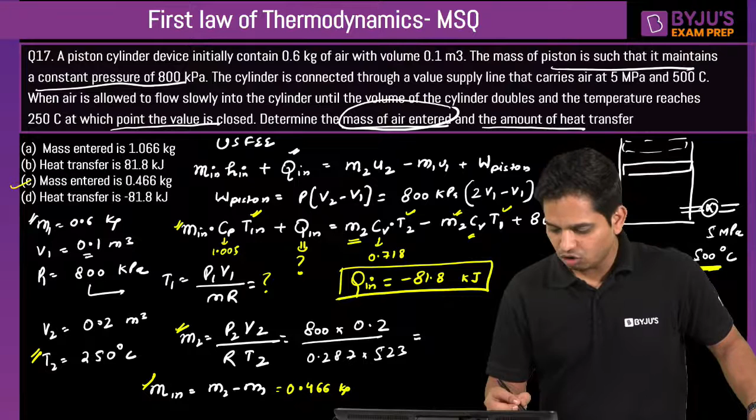Very quickly tell me how much is Q in. Q in is how much? Okay, I'll give the answer, and it is minus 81.8 kilojoule. So mass entered is how much? 0.466 kg. So mass entered is 0.466 kg and heat transfer is minus 81.8.

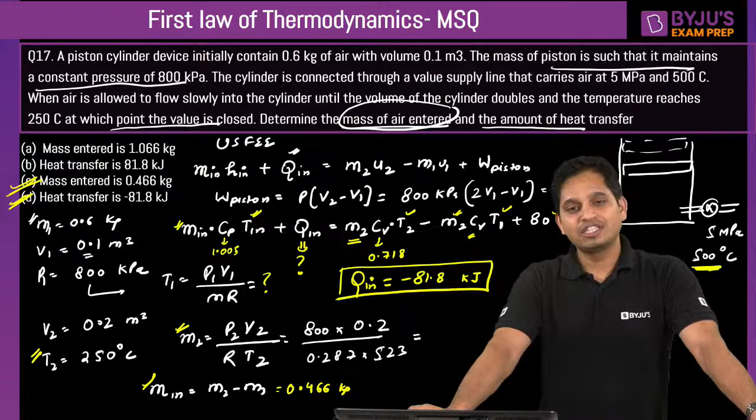Okay, so I hope you had a good practice today. Take the last question, this is 17th only which we just solved, and this is your last question, homework number 7.